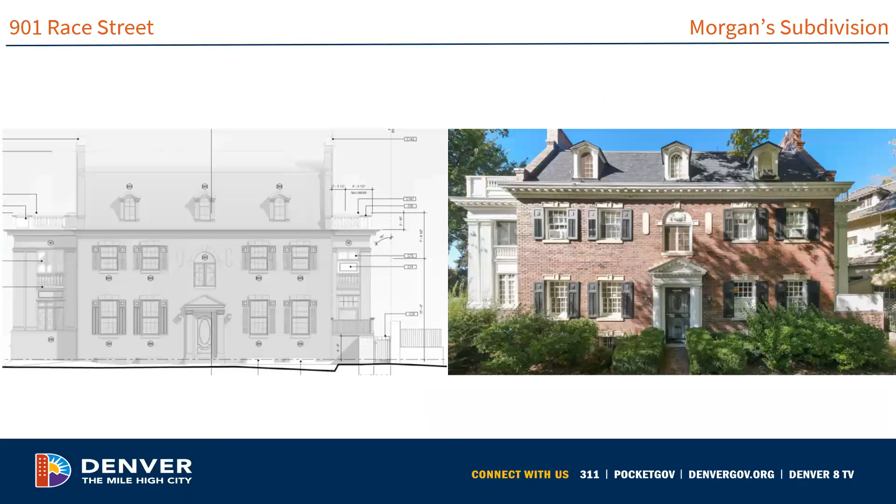Oh, all right. First. Sure. Woo! That's too much fun. That's all right. The public hearing process for all of you that are joining us virtually and or in person — the process is, I will announce the public hearing process.

Commission members will announce any ex parte contacts or conflicts of interest. Staff will introduce the application and recommendations, and the commissioners may question the staff. The applicant's presentation, limited to 10 minutes, happens after that, and commissioners may question the applicant. The public comment period gives anyone in the public 3 minutes per person to speak.

If you are joining us virtually and would like to speak regarding the project, and are not part of the applicant team, you can click the hand raise button; for those calling via phone, dial *9 to raise your hand, or email landmark@denvergov.org prior to the hearing. Then we will ask staff for any clarifications if necessary, the commissioners will deliberate, and then the commission will vote. At this point, we can begin.

Abby, would you like to tell us about this application? I think you need to open the public hearing. Open the public hearing.

Are you advancing slides or are you sharing this? I'm going to share the screen. Yes.

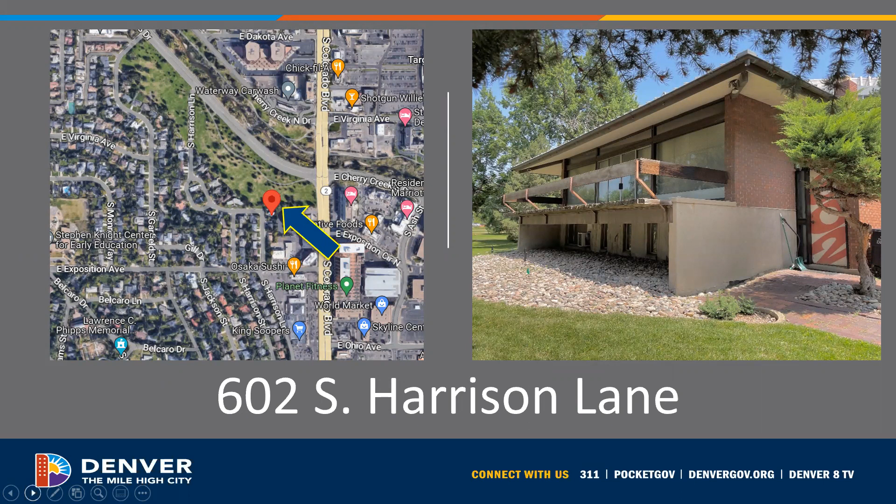It is within the Belcaro neighborhood, in Council District 10. It is on single family zoning, U-F-U-F. The owner is Alan Golin Gass — sorry, I'll restart there — the owner is Alan Golin Gass, and he is also the architect and designer of the building.

He is the applicant. The application was prepared in conjunction with Docomomo, and Historic Denver assisted with the preparation of the application. This is owner-supported.

So here's the proposed boundary. It basically just follows the property line immediately around the house. You can see that the property immediately abuts the City of Brest Park to the north, and an adjacent parking lot on the east.

So who can apply for designation? This is a community-driven process that needs to be done by the owner of the property, the manager of community planning and development, city council, or 3 residents of Denver. In this case, this is an owner-supported designation — it is the owner, Alan Gass, who is bringing this forward.

When we're looking at eligibility, we are looking at whether or not a structure maintains its integrity, is more than 30 years old or is of exceptional significance, meets at least 3 of 10 criteria, and also whether the LPC considers the historic context associated with it.

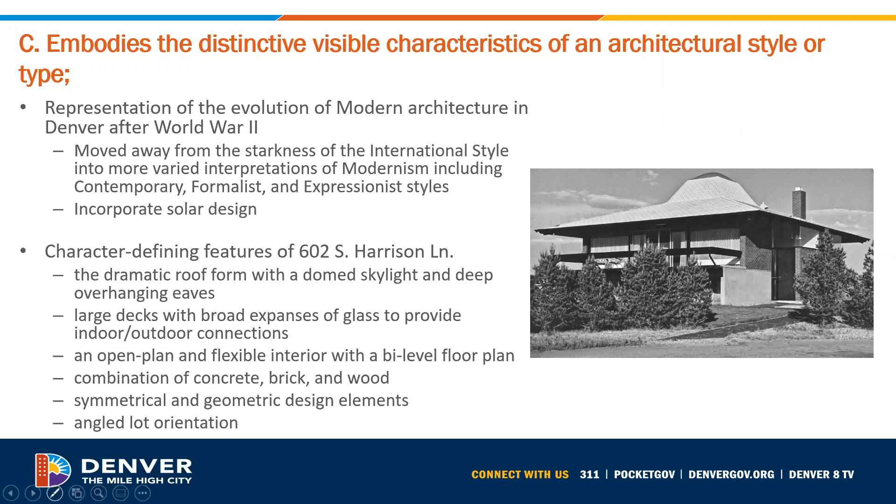Finally, criterion D recognizes a significant example of the work of a recognized architect or master builder. The Gass House is significant as an example of the work of Alan Gass, who made substantial contributions to the fields of architecture and urban planning in Colorado. Through his long career, he was a prominent member of Denver's architectural community, working both independently and collaboratively with other architects, and contributing his expertise to a variety of planning, arts, and civic organizations.

Born in Denver, he graduated from Harvard Graduate School of Design in '56. His early career worked for I.M. Pei, Fisher and Davis, and James Sudler. He established his own firm with Robert Brewster Gay in 1961. After that firm ended in the late 60s, he went on to work with several other prominent architecture firms.

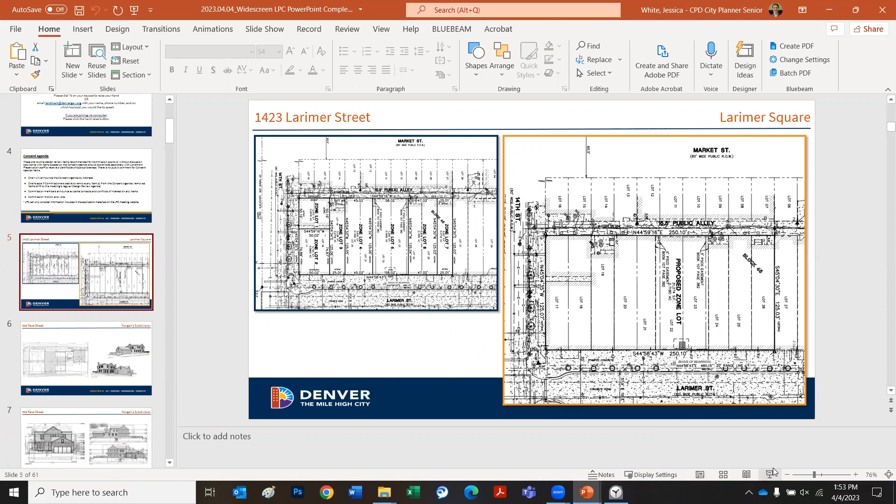So I do have a question for staff, since Larimer Square was taken off of the consent agenda, should we do that one first? Okay, Graham, just so you know, you recused yourself during the consent agenda, and we decided to take off 1423 Larimer. Are you able to join us with that? Yeah, I guess I'll say for the record, we're working with the owners on other buildings, but I have had no involvement or association or any previous familiarity with this particular part of it. I think I'm in the clear there. Okay, great. Thank you very much.

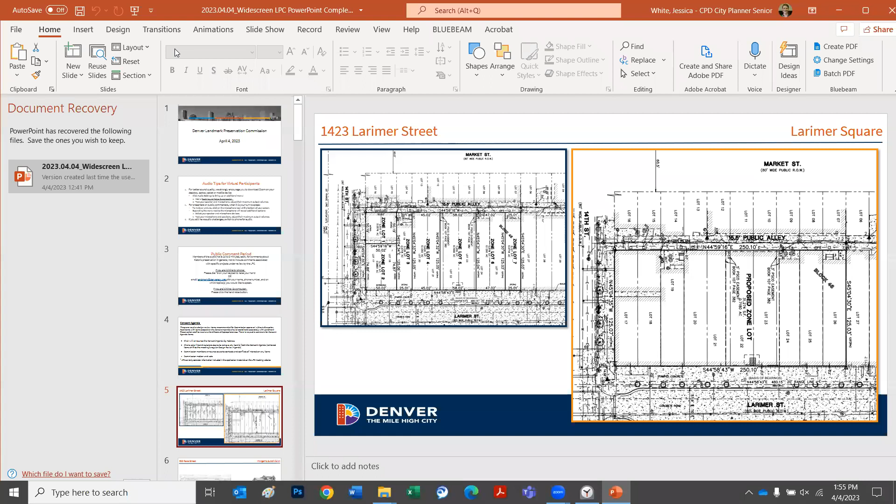Then we will begin. Oh, sorry, my computer just clicked out and decided to shut down PowerPoint. Well, of course it did. Give me 1 second to get back out. Allowing me to put this presentation in mode. Are you sharing your screen? I think it's because it's in recovery mode right now, and you have to fully open it to see. Let me stop sharing the screen real quick and try this again. Share.

Okay, all right, we are ready to begin. The project that was taken off the consent agenda is 2022-ZLAM at 1423 Larimer Street in Larimer Square, and Crystal is our staff person.

This application is to combine 7 zone lots at Larimer Square into 1 zone lot. No changes are proposed to the buildings with this application; it's a zone lot amendment only. On the left, you can see the 7 zone lots on that side of the block that are being combined. The other side is mostly already combined; I believe there's only one lot in the center that hasn't been.

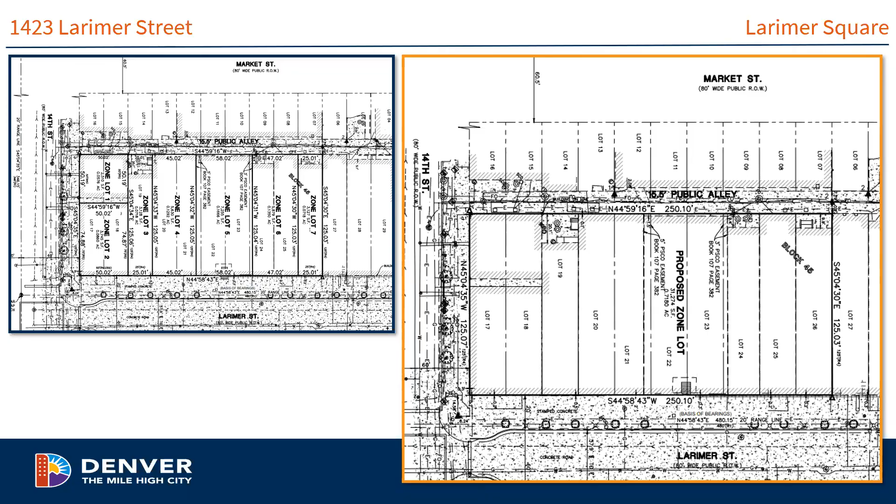Hello? Who's the applicant?

Gary, what's your preference? Well, in the past, on other projects where a project we were reviewing required a zone lot modification, they happened together, or the zone lot modification happened after we approved the design. I think I prefer that in this case as well, because it appears there is something planned or thought about. It may not have a line on paper, but there are ideas about changing Larimer Square. I'd like to see what changes are proposed before we change the zone lot configuration.

That's my perspective. So to me, that sounds like at this point you're leaning toward it. I think, yeah. So those changes may be interior related, and the commission does not have purview over the interior. So you have to consider that the zone lot amendment has implications on how the buildings are used and how they are connected internally, which the commission does not have purview over.

Well, wouldn't that be part of the explanation about why the zone lot application is being made? I mean, if they want to combine two interiors that are in separate zone lots and they can't do it because they're on separate zone lots, I think that in an application sense, even though we don't have purview over what they do to the interiors, the fact that they're doing something to the interiors and it requires a zone lot application, I think is something that would justify this, wouldn't it?

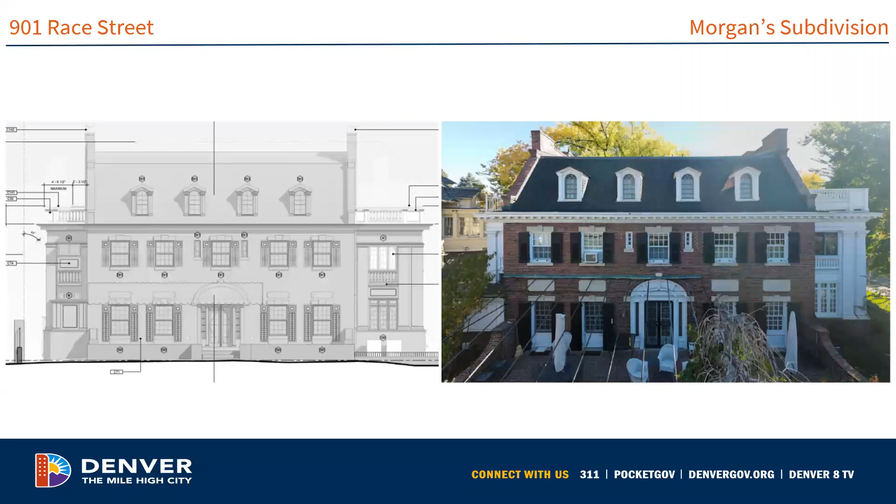No, for some reason it won't let me start on the screen that I'm on. I have to look through the whole thing. Give it a few seconds, it should give you...

This application is for 3044 Champa Street. The applicant is proposing to construct a new infill single-family residence with a garage ADU on an existing vacant lot in the Curtis Park Historic District. The lot is part of the Denver Housing Authority's redevelopment of the Platte Valley Homes and is outlined in red on the left. Development along this block of Champa Street will have a consistent 20-foot setback as shown on the site plan. Both 3052 and 3042 Champa Street on either side of this property also have that 20-foot setback, already approved by the council.

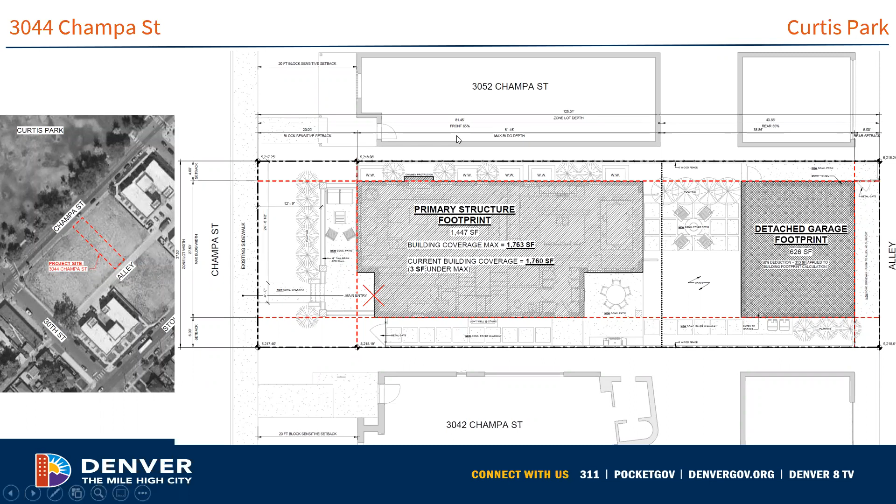At the top of the screen is the streetscape comparison for the whole block, showing the proposed infill structure with blocks around it near the center. The new proposed house is a combination of Queen Anne and Italianate styles and will be approximately 30 feet tall, a height consistent with other houses on this block. At the bottom is a closer view of the proposed structure next to the adjacent approved design.

Staff does have concerns over the proposed infill structure's width at 27.53 feet wide, as it's not consistent with other house widths on the block or in the surrounding context, meaning it's not meeting design guideline 4.1. However, the lot is wider than other lots on the block, except for the one lot adjacent to the right at 3042 Champa, which is the one it is similar to. So the proposed footprint is also slightly larger than 3042 Champa Street, so it may not be compatible with the district or historic lot coverage patterns.

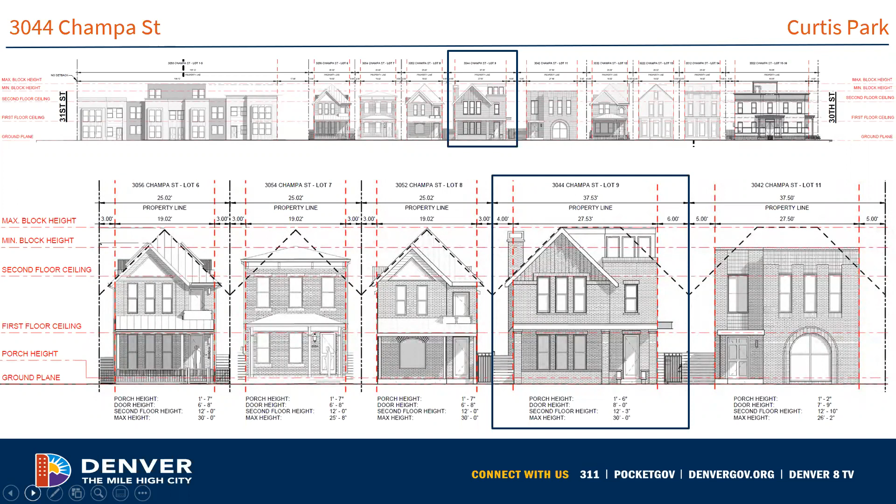Here's the compatibility demonstration showing other Queen Anne styles in the district that the proposed design is partially based off of for this new structure. Of these houses, only one at 3000 Stout Street is larger than the applicant's proposed 27.53 feet width. Additionally, the examples shown with masonry front porches at 2720 Stout, 3144 Stout, and 2619 Champa Street all appear to be examples that have been altered over time and were likely not original to these structures. The porch proportions on the proposed new infill structure are not typical of Queen Anne or Italianate styles in the district. Porches on Queen Anne style structures are typically less heavy and do not typically have masonry columns or walls. Therefore, staff believes the proposed front porch structure does not meet design guidelines 4.3B or 4.16.

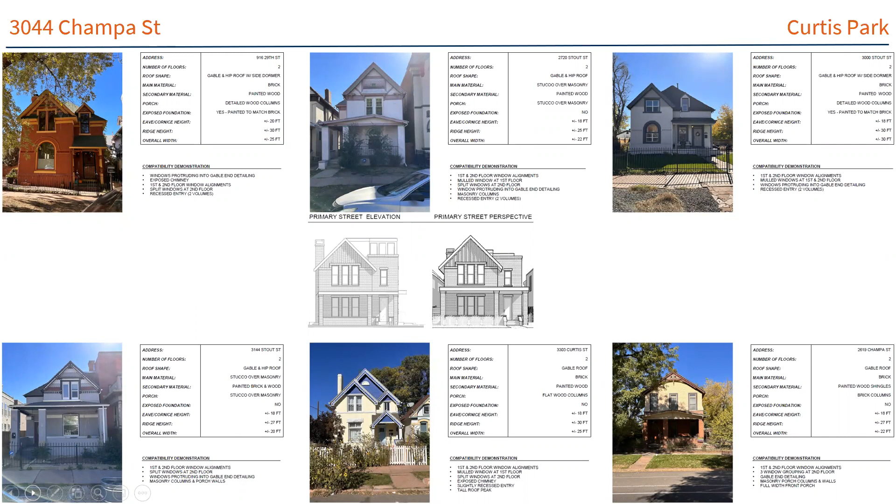So here on the left, you can see the proposed structure design. Design guideline 4.4 states to design the height, mass, and form of a new building to be compatible with the historic context. The building form, a combination of Queen Anne and Italianate, as well as the width, is not characteristic of the district. Their overall width is larger than all other examples provided. Additionally, this combination of the two styles is not seen anywhere in the district and does not fit with the surrounding historic context.

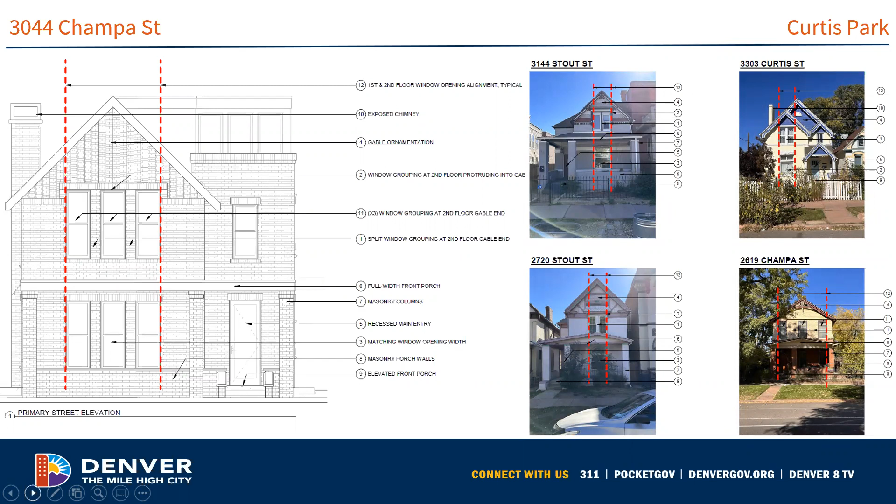Here's the front and rear elevation of the proposed structure. Design guideline 4.5 states to design a new building to be recognized as current construction while respecting key features of the historic district, as well as the surrounding context. The proposed design will be recognized as current construction, as it is a combination of Queen Anne and Italianate styles, which is not seen in the district. However, the combination of styles is not a simplified interpretation of historic design within Curtis Park, but a more complex design. The design is not compatible with massing or forms found in the district and stands out since it is a combination of these two styles, and is not neutral.

The house includes typical features like a front porch. However, the flat roof and masonry design of this front porch is not typical of either the Queen Anne or Italianate style used in the massing. Combining it as a third element to this design, which is more contemporary, creates an overall design with three different combined styles.

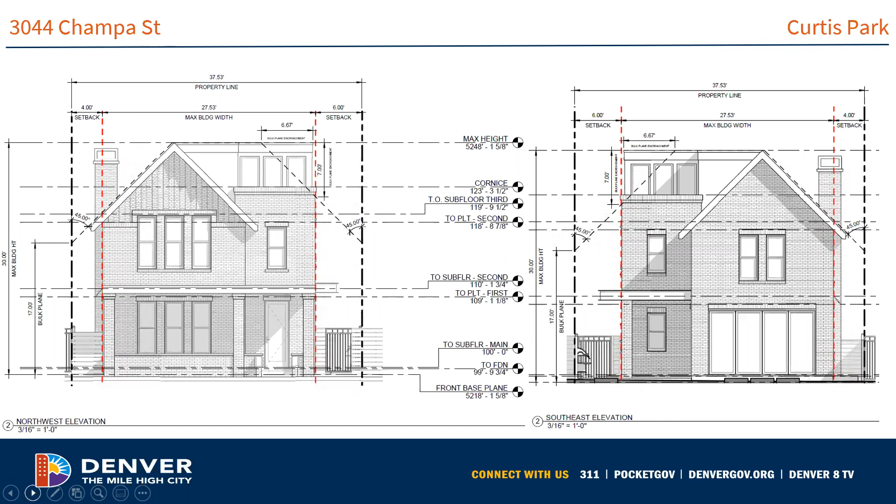Here's side elevations of the structure, which also show the proposed roof form. Design guideline 4.6 states to use a roof form that is compatible with the historic context. The proposed structure will have a combined front gable and flat roof form with a center tower that is not historically found within the district.

Additionally, design guideline 4.17 states to ensure that decks are compatible with the surrounding historic context. Staff has concerns with the two rooftop decks proposed at the front and rear of the structure - the first one behind the parapet of the Italianate portion, and the second behind the center tower access to the third floor. The rooftop deck will cover a large area of the roof and begins at the front facade parapet wall. The roof deck may not be visible from the street, as it is screened by the parapet wall, and the second rear roof deck is not oriented away from neighbors' yards.

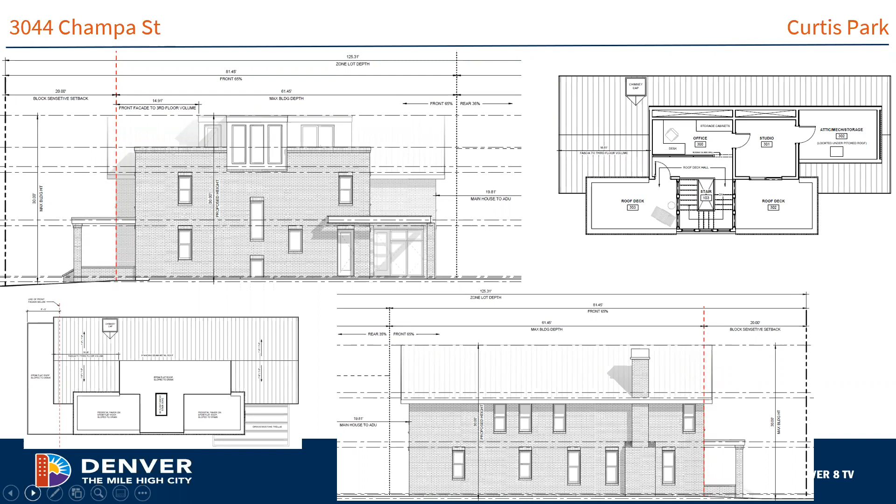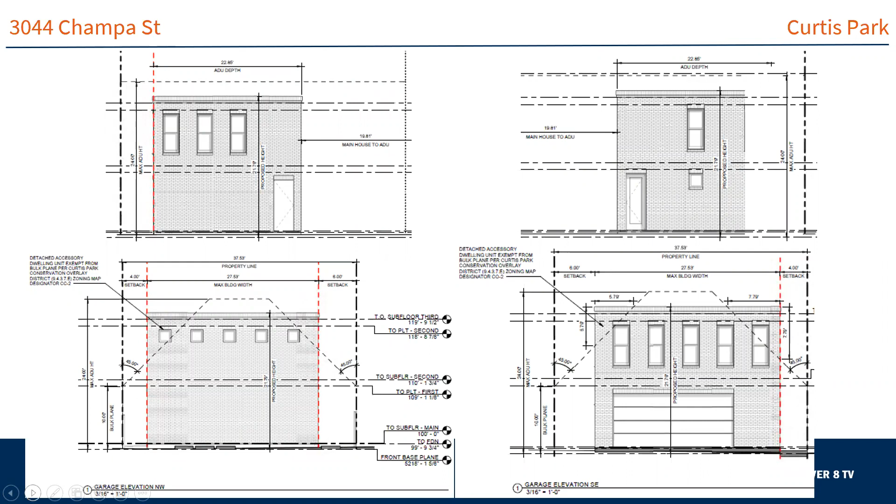I do. I can't scroll to this page of your application, but it's right past the sheet past LM 200B that looks at the roof massing studies. I wonder if you could talk a little bit about those and the process and decision-making around that?

Yes. I believe this sheet over here, right? I believe mine has, yes, it has elevations on the left and perspectives on the right.

So in evaluating all of the staff comments and the neighborhood comments, honestly, I think their obsession with Queen Anne is overwhelming to us, because the more study that I did about the Queen Anne representation in Curtis Park, it was actually pretty bad. They're basically saying it's eclectic in nature, it never developed far enough. Most of the people that did it were kind of winging it—they were not architects at the time.

So the fact that we're cornered into trying to emulate this style, to be honest, was difficult. But anyway, all of these studies were just representing their ideas for us to involve.

Every single time we went with this Queen Anne's, we have very specific comments from them, who would say, use a combination of the gable roof and the hip roof, which is that second one from the left on top. Honestly, the proportion of the whole thing got even wider. So on one side we're criticized because our house is wider, but the comments asking us to do this would actually make the house appear wider. So that's what these studies were doing.

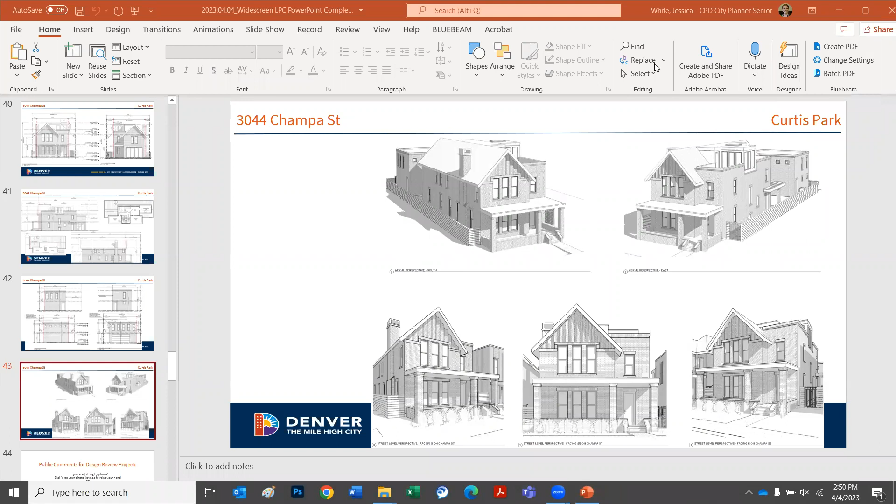Thank you. Any other public comments, Taylor? No, I don't see any. All right, thank you. Commissioners, do you have any questions for staff, or staff, do you have any redress? All righty then, we will go into deliberation at this point.

Commissioners, how do you think this does? Let's start on this, you certainly can. To me, I looked at this and I couldn't quite see what all of the issues were, but let me start. The lot size is what the lot size is. The lot size is bigger than the other lot sizes. That's not an issue that is really within our purview, that's the lot size that the owner has.

Second part has to do with the bulk plane violation, because I believe bulk plane violation points up the issue with that tower. And I would be inclined to say that I would not support a bulk plane violation, and that maybe the architect would have to go back to the drawing board and figure out how to get that piece up there, but keep it within the bulk plane. I think that would solve the main issue.

And I don't understand actually why people call this two styles. There are many houses, I mean, just because there's a flat piece there, doesn't mean it's Italianate. So it's funny, I looked at that and I couldn't quite understand why it was being denied, although I will say again, I would not support a bulk plane zoning. I mean, I wouldn't support an administrative adjustment.

I think the porch is an interpretation of the porch. Yeah, excuse me, I'll jump in. I think that roof decks, and the applicant said it's a modern amenity, and I thought that was appropriate because it really, I mean, there are porches and all kinds of historic exterior spaces that we see.

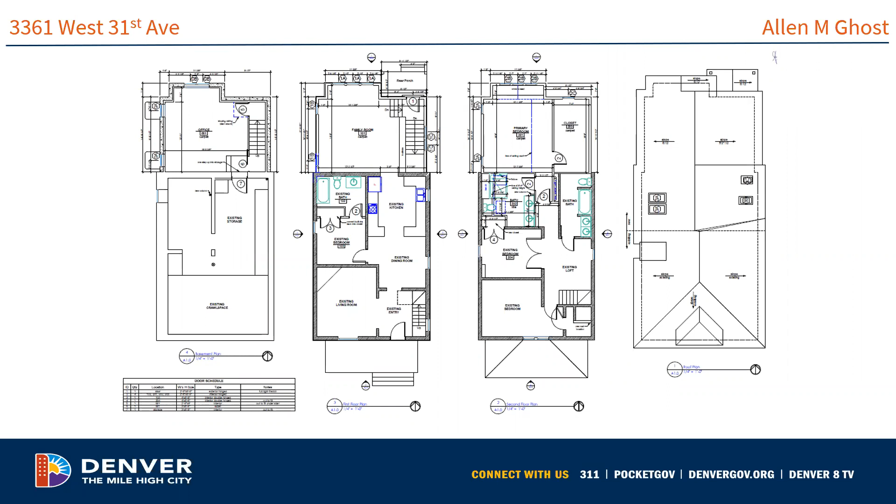And then you can just see the footprint for the addition here. The addition footprint is 17 feet by a little over 22 feet, and the proposed addition height is 24 feet 9 inches. So here is the proposed addition.

Again, the ridge line of the new addition will tie in to the ridge line of the historic roof. It will be minimally lower, so the original roof does remain prominent. And the addition is inset on both sides of the historic structure, and it does feature a change in materials as recommended by our design guidelines.

The proposed form is a nested gable type form with a rear one-story porch, and then simple 1/1 double hung windows on the rear and sides, and the addition will be clad in fiber cement siding with a 5-inch reveal. In the past we have required a 4-inch reveal, but with our design guideline update, we changed that to 4 to 6 inches for siding reveal.

So this is a 5-inch siding. I did just want to point that out to the commission, as we have historically required 4-inch, but with our design guideline update, that is an appropriate profile.

The staff does have one concern on this drawing. It does indicate that the windows will be casement, awning, and fixed windows. The elevation drawings, as you can see here, are showing what appears more to be a double hung window in appearance. So if the windows are to have a false mullion, it should have substantial depth to replicate the appearance of a meeting rail, and it should be located on the interior and exterior of the glazing with a spacer bar in the middle to give that appearance of a double hung window.

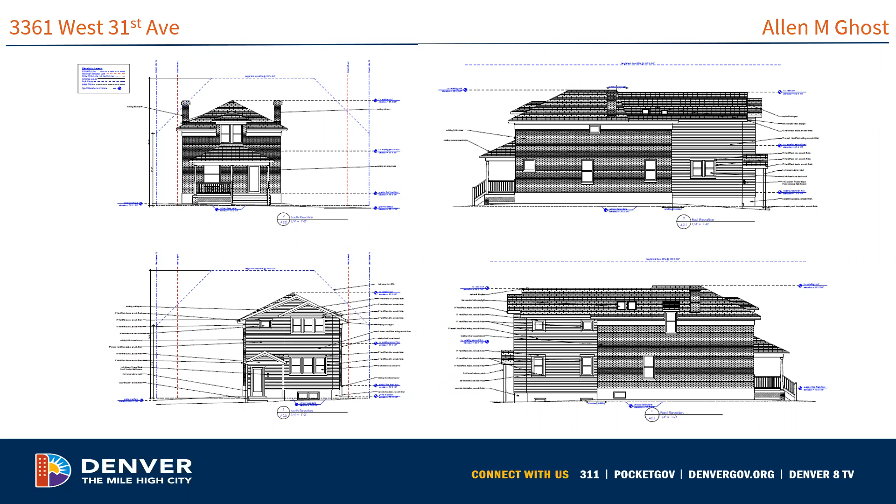It doesn't really show the addition that's to be removed. Is that an issue for you? It's not an issue—they would need to show it in their permit set, but typically when we're talking about demolition, we're more concerned with the demolition calculations for the contributing elements. So while it's not shown, and it would change the demolition figures overall, we wouldn't calculate it as part of our 40% to trigger the public hearing, because that's only for the historic fabric.

Thank you. Hi, can everybody hear me? We can, thank you. Hi, thanks for having us today and allowing us to present a bit, and for addressing this request that we have.

My name is Brian Kurzel. I live at 3361 West 31st Avenue in Denver, in the Allen M. Ghost Historic District. My wife, Sasha Gubser, is finishing her shift at Denver Health, so she's not able to join today, but I'll be representing our family along with my colleague, Ginger Bim, who I hope is here. She's our architect that we're working with on this project.

My wife and I, Sasha and I, bought this house in August of 2006, so we've lived here for about 17 years—before the Ghost Historic District was actually established. We have raised our family here. We have 2 kids that were born in this house and they want to stay in this house. My daughter's now a freshman at North High School and my son is at Sandoval Elementary. Rather than be forced to move out of this neighborhood as our kids are getting bigger, we have an interest in expanding our indoor space while making sure to really be cognizant and respectful of the character of this neighborhood that we appreciate so much. That's why we chose to work with Ginger as our architect, who's done a variety of projects on houses similar to ours in this neighborhood. So we've been very excited to work with Ginger to try to figure out a way to do this.

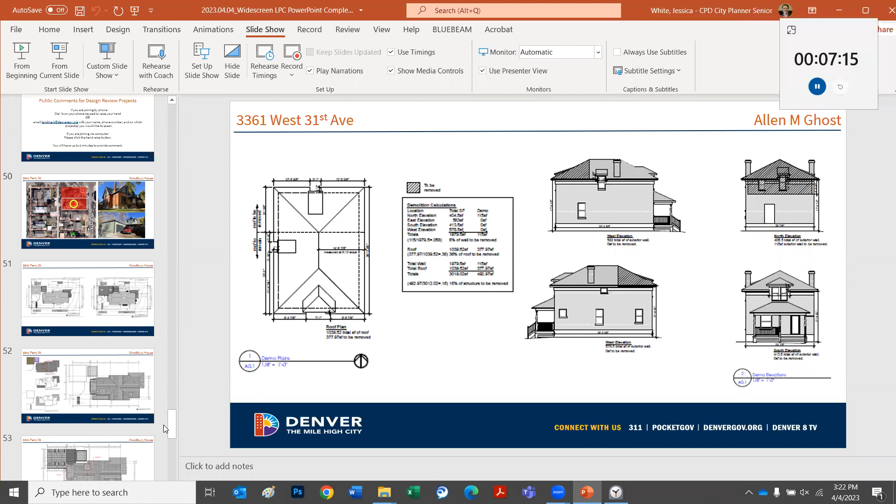Our intent with this was to follow all of the guidelines and rules. It was kind of tricky because the existing roof structure is shoddy, and having the hip on the back makes it very hard to connect to the new addition. That is why we ended up demolishing more of the roof than I planned on doing. But we've worked with a structural engineer to figure out how to solve some of the problems in the existing roof and add on to the house in a way that keeps the addition secondary to the house by dropping the roof line and figuring out how to not change too much of the existing floor plan. Structurally, we needed to add a couple of columns to support the new roof line ridge. I feel like we've done a pretty good job of accomplishing what the Landmark Commission would want.

I hear your comments on the windows. We're very happy to change all of them to casement with no bar. I really did think that was just a requirement to make them look like double hung, so that was a misunderstanding on my part, I guess. So I don't think the windows are a big deal in this.

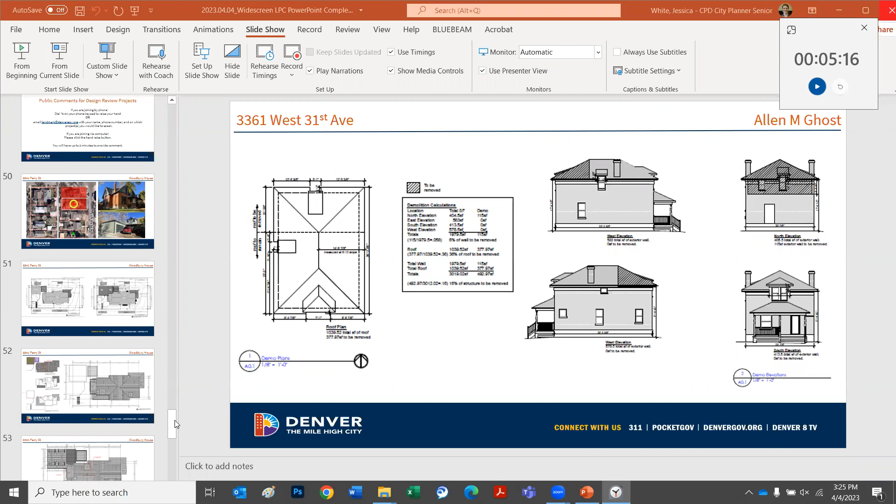Thank you. I have a question about the roof plan. It looks like the slope of the eastern section of the roof is actually slightly lower, less steep, than on that addition. Is that because... we really couldn't keep that? Do you want to pull it up first before I start talking about it?

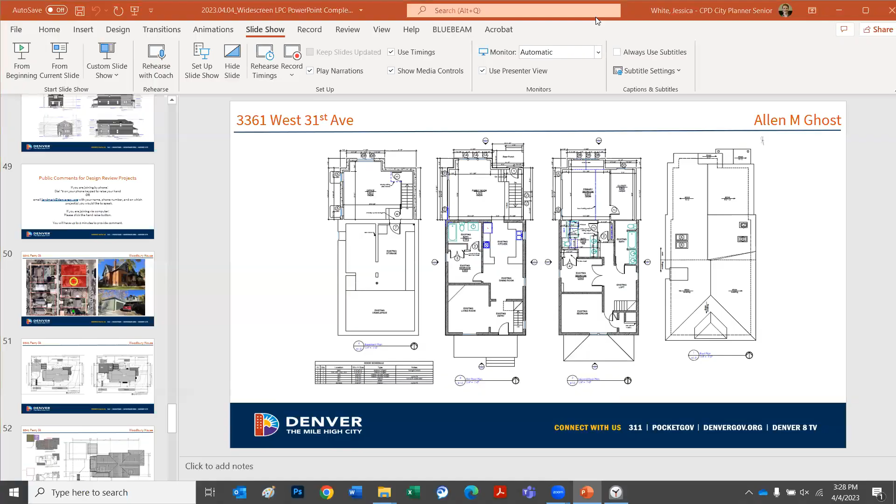Second. Ann and Graham have seconded. Thanks, Ann and Graham. All in favor, aye? Aye. All opposed, nay? Abstain? All right, it passes unanimously.

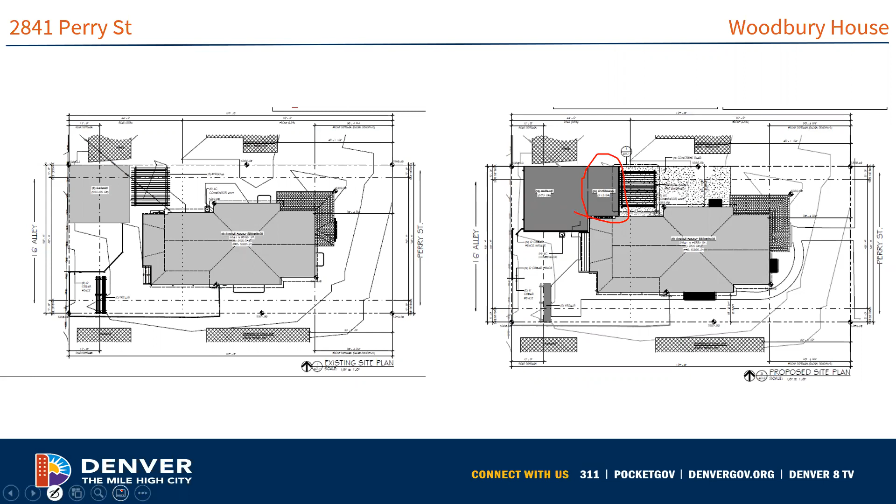So staff generally are supportive of this structure. We did have some concerns over the placement in terms of relationship to the house and zoning. However, the applicant has assured me that these are allowed, but if they're not, zoning will look at that closely in terms of placement on the site. So the applicant has indicated that that's appropriate.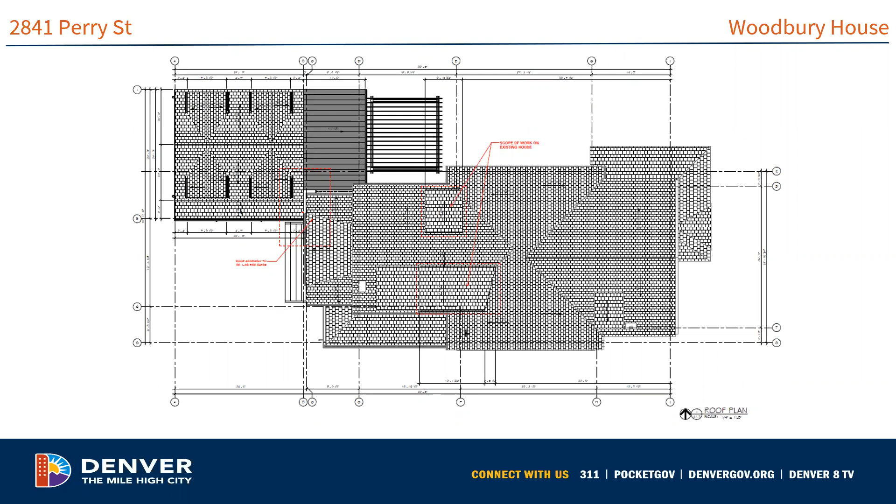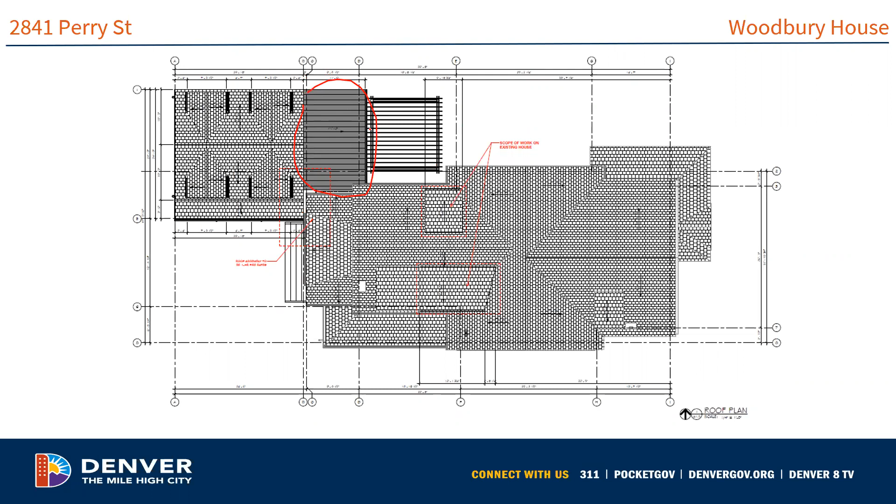So here is the proposed roof plan. The new garage will have dormers on it as well. This is to provide light into a loft space that is proposed for the garage. The garage does meet zoning requirements in terms of footprint and height, so staff did not have concerns over that, and it is just a loft space if you look at it in floor plan. And then here is that metal roof breezeway structure that I was talking about, and that pergola structure that is forward of the primary structure.

So the dormers are located behind the cross gable and will not be visible from the public right of way, so it's best to look at them in elevation.

So the dormer on the south roof slope is proposed to be clad in a vertical lap siding, and the dormer on the north roof slope is proposed to be clad in a cedar shingle. Actually, I think it's a round shingle. Let me check my notes. But the dormer on the south slope is proposed to be clad in this material because it matches the existing cladding material for that expansion. And the dormer on the north slope is a totally new dormer.

Staff do have some concerns over the variety of materials that are proposed here for this addition. However, these dormers are not really visible from the public right of way, so I didn't make note of it in my staff report. But more specifically, I have some concerns over the profile that is proposed for the shingle, noted as a 7-inch exposure. Again, we normally allow 4 to 6 inches. The applicant states it is matching the exposure on the house, but the existing house doesn't have documentation indicating to me that it's that exposure.

I'm not saying it doesn't, but again, the exposure may not match the existing house, and there are several different materials proposed. So we do have some concerns over that.

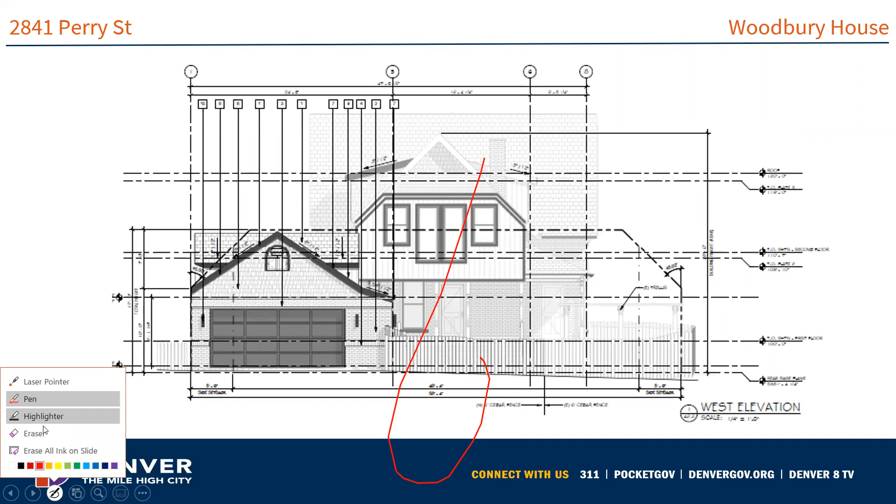So staff do have some concerns over the number of materials that are proposed. Let me see if I can figure out how to get rid of this line I just drew on here. Okay, I can't, so we'll just move on.

So here is the front of the garage and that metal roof structure, and then you can see the dormers on the side. The dormers tie into the ridge line, again, to allow light into that space that is shown. And here is the pergola structure that will be forward of that shed roof with the metal roofing. This is a wood pergola structure.

Also, in window section, the windows are indicated to be inset 2 inches into the wall plane. However, the window section materials show a lap siding material, and the structure is proposed to be clad in shingles and vertical siding and brick. So there are some conflicting details in the sections and notes of the materials.

Doesn't look like there's anybody there that wants to make a public comment, but let's see. Anyone out there wish to make a public comment on this project? No hands raised. All right, okay, staff, did you want to say anything additional?

I didn't make a condition on the materials because as the applicant said, they do all appear on the house. And you can't see that north dormer, but all the other dormers are clad in that vertical siding. So I struggled with it a little bit, but I ultimately didn't make it a condition to change that material. But I do need clarity on that exposure if the commission is comfortable with that half round shingle, because it is 7 inches and it's on the gable faces of the garage as well.

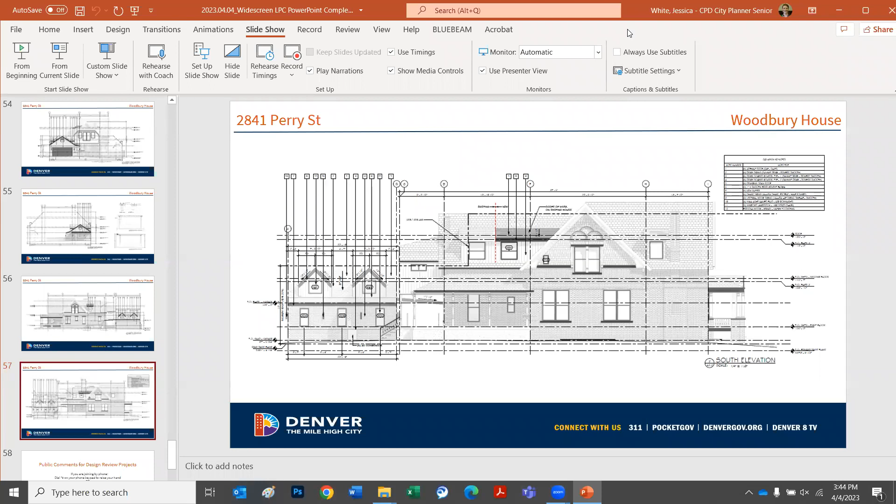Commissioners, do you have any questions? Okay, great. All right then, commissioners, let's go into deliberation. Any thoughts about the project, how it meets the guidelines, or doesn't meet the guidelines? Any thoughts?

I have a concern about the configuration of the roof at the garage and whether or not it meets guideline 4.19: design a garage or accessory dwelling to be compatible with and subordinate to the primary structure. And C, use simplified versions of building components and details found in the surrounding historic context. I think four dormers on top of this little tiny structure, with the roof and everything, just seems to me to be overly complicated and does not really meet guideline 4.19. But I'd be interested in what other commissioners think.

Other commissioners? I had the same thought. I'm trying to weigh it against the fact that it's at the very back of the lot and a very large house that's going to obscure it. But yeah, I do agree with your thought in part. I mean, I think that because it's only one space, the forces that required this kind of complexity really aren't there. There's a loft, there's a garage. And for some reason, there are times when we understand complexity because it's meeting a lot of different requirements, and this is not one of those cases.